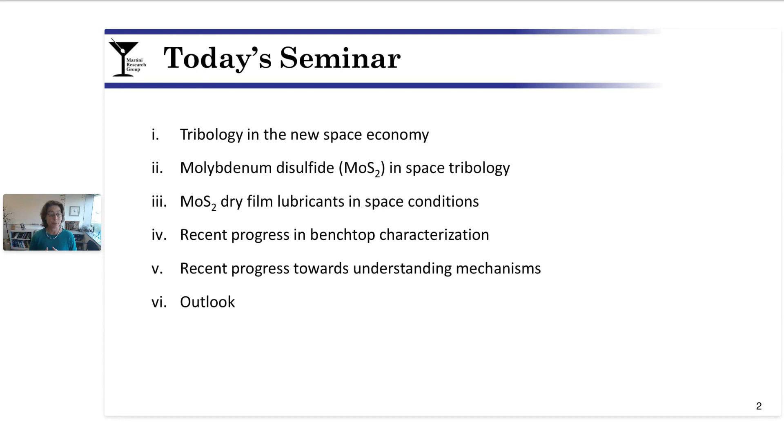So today's seminar is going to be organized as follows. We'll start at a real high level and talk about tribology in the new space economy. Then we'll dive in and focus on molybdenum disulphide, or MoS2, in space tribology and its properties in space conditions. Then I'll share some recent results from my group in terms of benchtop characterization and understanding fundamental mechanisms.

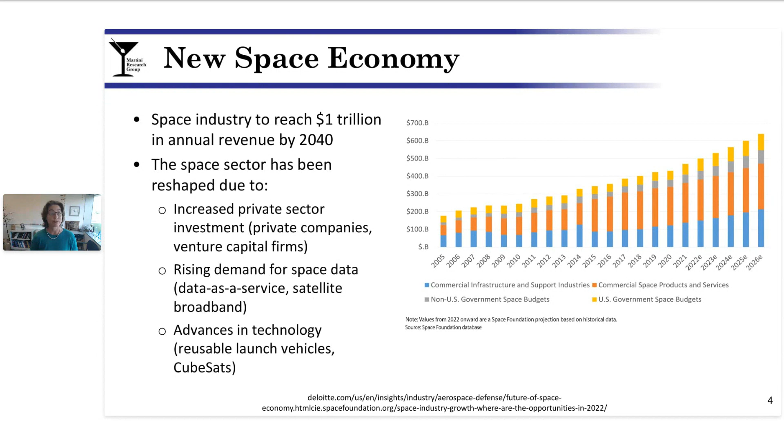Another way to look at the growth of the space industry is in terms of number of objects sent to space. So the plot that you can see here on the left is number of objects sent to space per year starting in 1990. And you can see that it's pretty constant, around maybe 100 or so objects sent to space until about 10 years ago. And then there's a rapid increase in number of objects sent to space, such that now we're talking about thousands of objects sent to space per year, or multiple objects sent to space per day. This has completely changed the way we think about the space industry, and in fact, probably the way we think about the Earth itself.

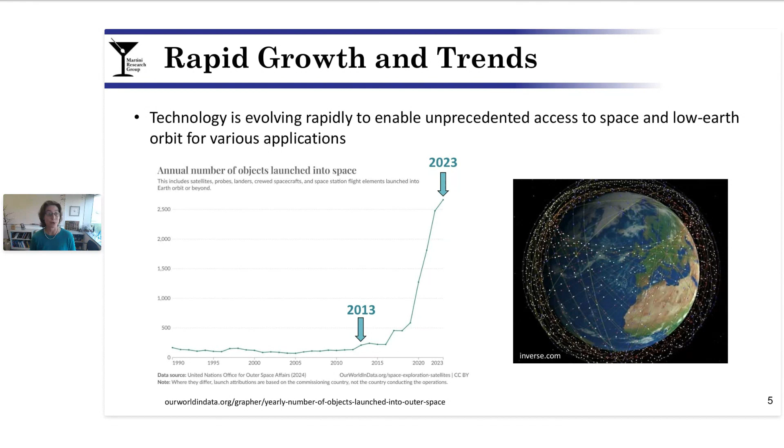So how does tribology fit into this big picture? Well, spacecraft, anything that goes to space that involves moving mechanical systems requires lubrication, and therefore involves tribology. There are a variety of prototypical mechanical components in space systems: solar array drives, reaction wheels, tracking antennas. All of these are mechanical systems that do have counterparts here on Earth, and we often think about space mechanisms in the context of, again, their terrestrial components.

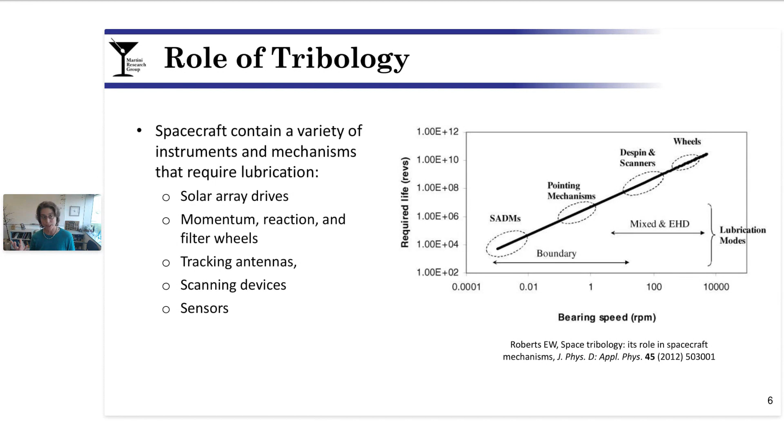Just as an example, the figure on the right shows required life versus bearing speed for a few prototypical space components where the lubrication regime is identified, sort of in the context of the traditional Stribeck curve. So there are many similarities between space tribological systems and terrestrial tribological systems. But there are also many key differences and, in fact, challenges associated with tribology in space. I would categorize these broadly into extreme conditions and, more recently, design for reusability.

So, as many of us know, the conditions in outer space are completely different from those that we have here on Earth, and therefore mechanical components must survive those types of conditions. Depending on the mission, this could include vacuum, could include radiation, very hot, very cold, or sometimes multiple different conditions in the same mission. This is an extreme challenge for tribological systems, but it's also an opportunity for us as tribologists because it gives us access to a wider range of conditions through which we can potentially better understand tribological mechanisms.

The other big factor is, again, more recent and associated with that more rapid or more frequent number of objects launched into space, and this is design for reusability. Today's launch vehicles are planned or intended to be used for multiple missions, where they go up to space, must experience space conditions, come back to Earth, experience some of our more challenging conditions like coast and marine environments, and then go back up. So these types of components have to survive many orders of magnitude longer than ever before. Again, a significant challenge, but also an opportunity for us as designers and engineers because it provides an opportunity for more frequent iteration and potentially more rapid design and development.

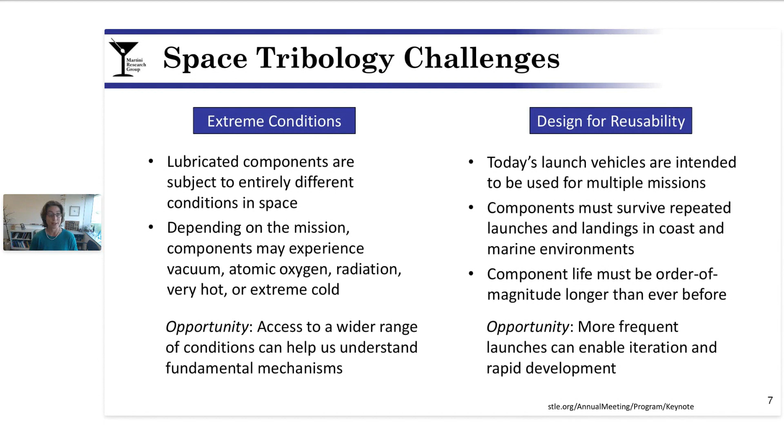All right, so I've talked a little bit at a very high level about tribology. Now let's focus in on today's topic, which is molybdenum disulfide. Molybdenum disulfide, or MoS2, is a naturally occurring mineral. It can be, again, found in nature or synthesized in the lab in a variety of different crystallographic phases. All of these phases comprise molybdenum and sulfur layers, and they can be found present in different crystallographic phases, having different thermal, mechanical, and even electrical properties.

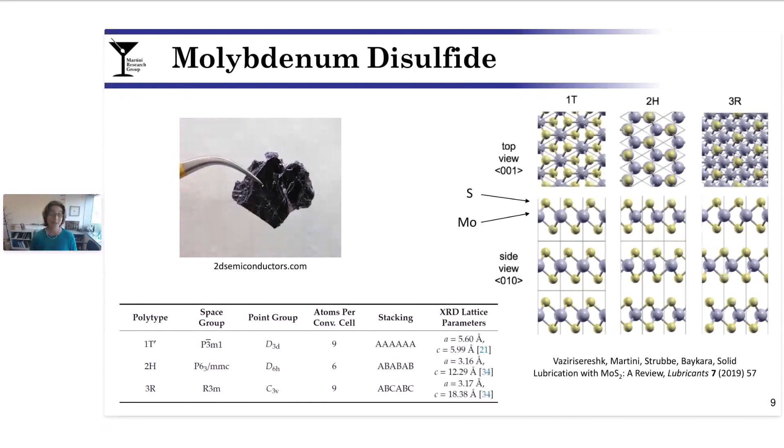However, from a tribological perspective, the most important aspect of molybdenum disulfide, or MoS2, is this layered structure, where we have very strong bonds within layers and very weak bonds between them. What this enables is the layers to slide very easily relative to one another, such that the material has low shear strength and imparts for us low friction and wear and good tribological properties.

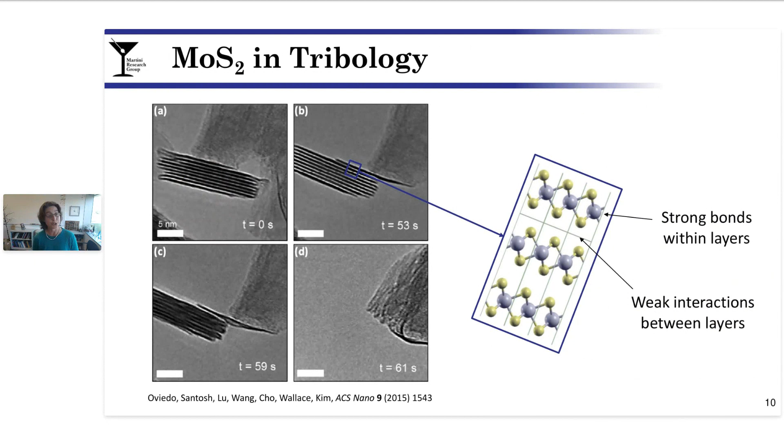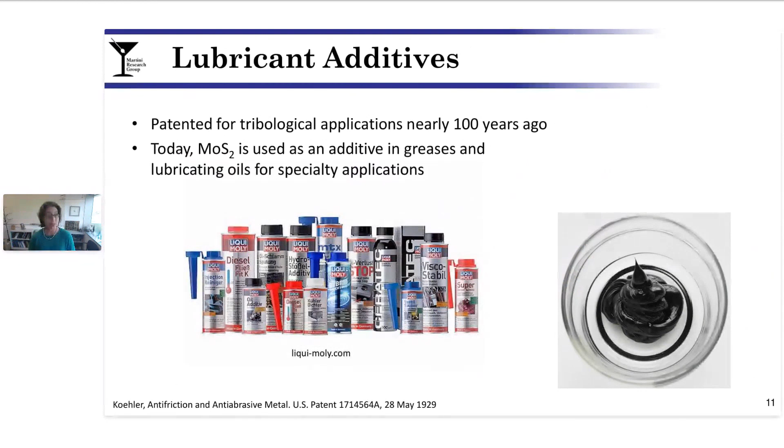MoS2 in lubrication is nothing new. In fact, the patent for MoS2 as a lubricant additive is almost 100 years old now. So it's been around for a while. And in fact, one can purchase MoS2 additized lubricating oils and greases for specialty products online even today. However, there are significant challenges with wet lubrication for space applications. The biggest one is associated with missions that have to experience extreme cold.

Just as an example, our Earth's moon at night or in permanently shadowed regions can reach minus 200 degrees Celsius. There's also great interest in exploring faraway lands like Jupiter's moon Europa, which has an icy crust and the potential for water and life underneath. But again, this requires actuation in extreme cold. To use a wet lubricant in this scenario, you basically have to heat it. This requires significant weight, significant cost, and most importantly, takes a significant amount of the total energy available for the mission.

Another challenge with wet lubrication is the finite vapor pressure of liquids. This could lead to outgassing or oil loss and contamination of very sensitive instruments. Therefore, for many missions, wet lubrication strategies are just not an option. The alternative, and what we're going to be talking about the rest of today, is dry film lubricants. These are slippery solids or solid lubricants and widely referred to in the industry as DFLs.

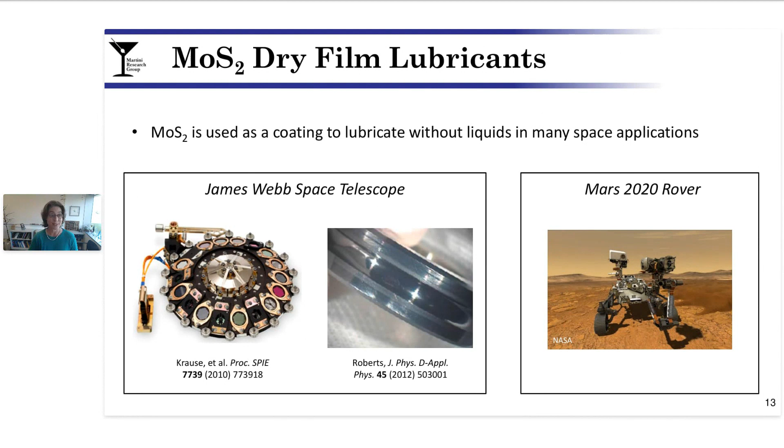MoS2 dry film lubricants are already used. Again, these are coatings or solid lubricants that are used without liquids. A couple examples are shown here. On the left, you see photos from the James Webb Space Telescope and an MoS2 coated bearing. On the right, you see the more recent Mars 2020 rover, where the actuating components in the sample caching system relied upon MoS2-based dry film lubricants. However, there are significant challenges.

So for the mechanical engineers out there, this may bring you back a little bit, but mechanical systems and components have been designed for decades, for a long time, to operate and are optimized for liquid lubrication. Just as a couple examples, I've shown you here some images from the ubiquitous Shigley's Machine Component Design. On the left side, you see a worm gear where the efficiency of the component is related to the friction coefficient. And on the right side, you see a rolling element bearing where we see the load-life relationship.

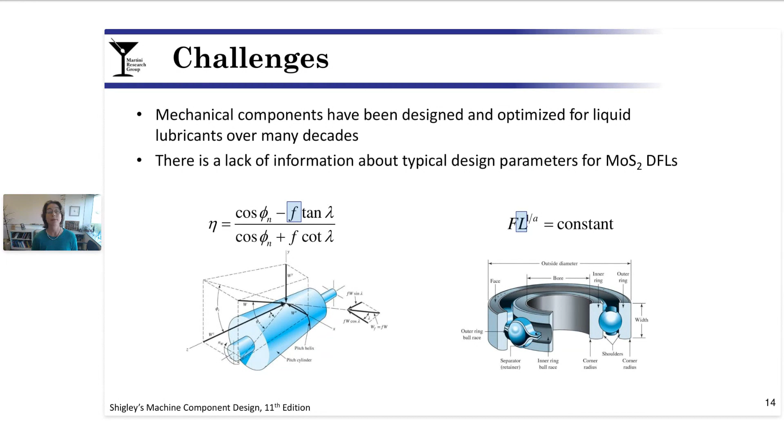These tribological metrics, friction coefficient and life, are pretty well characterized for liquid lubricants, and mechanical systems are designed to operate with these parameters. However, there's really a lack of information about what these parameters are for MoS2 DFLs, and even if the fundamental design equations may or may not be applicable. So how does MoS2 operate as a dry film lubricant in space conditions, and what are these design metrics?

First, how do we measure that? So ideally, one might wish to measure performance metrics in the application, for example, in the International Space Station. This may not be accessible to any of us, so often testing is performed here on Earth. This can be done at the component or subsystem level, or most commonly using benchtop tribo tests, where simple geometries like a ball and a flat are used to provide a comprehensive set of characterization data. Again, I'm referring to things like friction coefficient and life for MoS2.

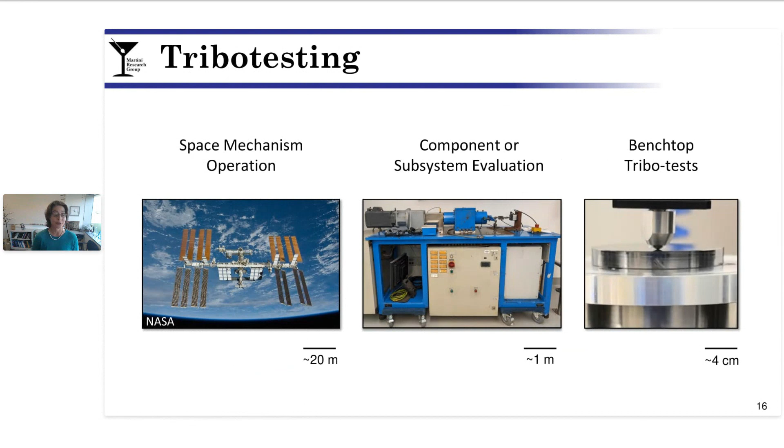But I think I mentioned this before, that conditions are extreme in space. So when we perform testing here on Earth, we do want to try to mimic space conditions. And this can mean a lot of different things. First of all, it's important to test in ambient conditions. It's important to test in air. And this is because every space component before it's sent to space has to be stored and tested here on Earth. And it's expected there was unplanned relative motion in components during transport to launch sites.

We'd like to perform testing here on Earth in a vacuum-controlled environment to mimic the low oxygen and low humidity conditions of space, as well as the low pressure directly. Or an alternative, easier approach is to test in dry nitrogen, where test chambers are flooded with nitrogen. Again, the goal is to remove the oxygen and humidity to mimic the space condition in a little bit easier to access type approach. We've already talked about temperature. It can be very hot, it can be very cold, and these types of conditions can be mimicked in specialized chambers here in a terrestrial environment.

So what do you get out of this? Shown on the right here is an artist's rendition of a friction coefficient versus sliding cycles plot. You measure lateral force, you calculate friction coefficient, and it looks something like this. You see a rapid decrease right at the beginning of the test. This is associated with run-in. Then you see a long, steady state, low friction period. This is the majority of the operation of the mechanical system.

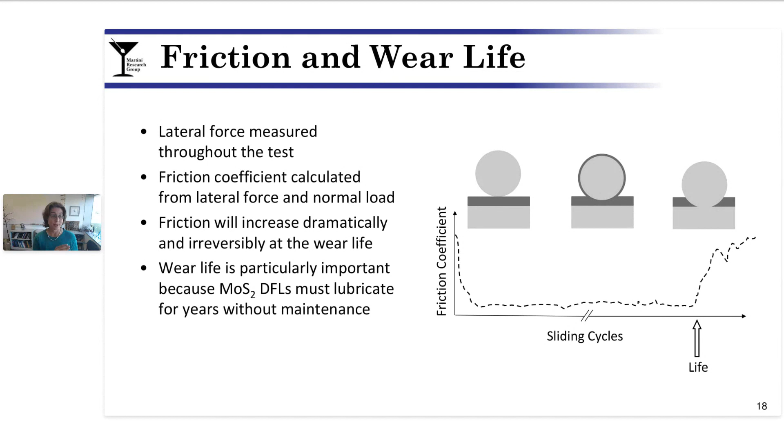So let's look at some representative results. What I'm showing you here are two plots of the friction coefficient as a function of either cycles or time from the literature. On the left, I'll bring your attention to comparing the green line and the purple line. The green line was tested at room temperature in humid air, and the purple line at room temperature in dry nitrogen. And what you can see right away is that the performance is far better with the purple data set, where we have no oxygen and humidity. And when I say better, I mean lower friction coefficient and longer wear life.

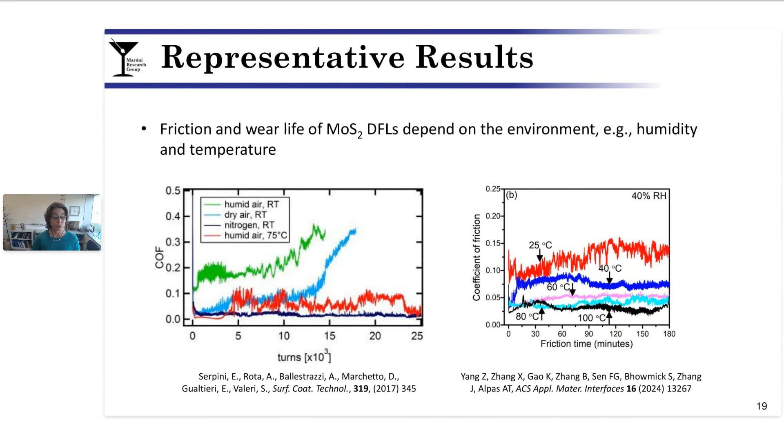In the figure on the right, the tests were performed all at 40% humidity, but at different temperatures above room temperature. And this result shows you that friction decreases with increasing temperature, again, above room temperature. So there's clearly a sensitivity to the environment of the MoS2 dry film lubricants. This can be largely attributed to the interactions between the MoS2 and oxygen and/or water, both of which can disrupt the easy shearability in different ways. Oxygen can chemically bond with the molybdenum disulfide to ultimately form MoO3, a less lubricious counterpart.

Water physically adsorbs to the MoS2, particularly at defects and edge sites. Both of these are disruptive and therefore can explain the observed poorer performance in humid conditions. However, oxygen and water interactions can also explain some temperature dependence.

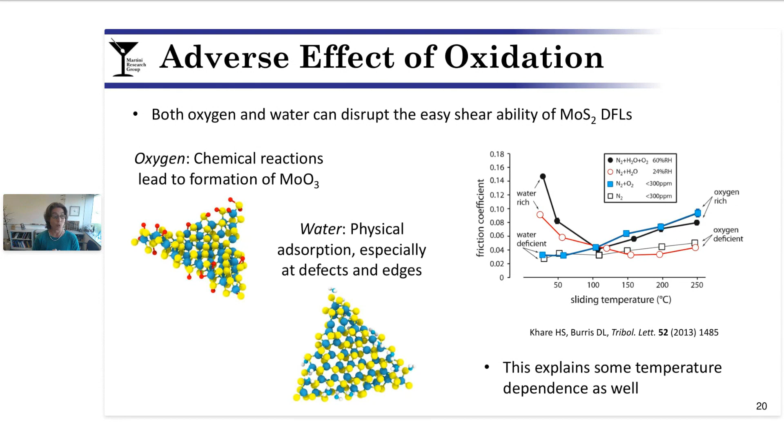The figure on the right is showing you friction coefficient versus temperature. The red data set was performed in water environment, and the light blue squares was performed in oxygen. And you can see that the red data set decreases with increasing temperature, and this is because increasing temperature desorbs water, whereas the blue data set increases with temperature, and this is because increasing temperature accelerates the chemical reactions associated with oxygen and MoS2. So the key to understanding some of these trends is understanding the role of water and oxygen in interacting with the MoS2.

So how do we mitigate this? One approach to mitigating the adverse effects of the environment and more generally improving the performance of MoS2 dry film lubricants is through the use of what are called dopants. These are elements or other compounds that are introduced into the MoS2 during deposition or synthesis. There have been a variety of different elements explored for space DFLs, including titanium, nickel, gold, and antimony oxide.

These elements or compounds can either substitute for the Mo or S in the lattice, they can intercalate between the layers, or they can potentially form separate phases. And which one of these happens depends on what is the element, what is its concentration, and the conditions during synthesis or deposition.

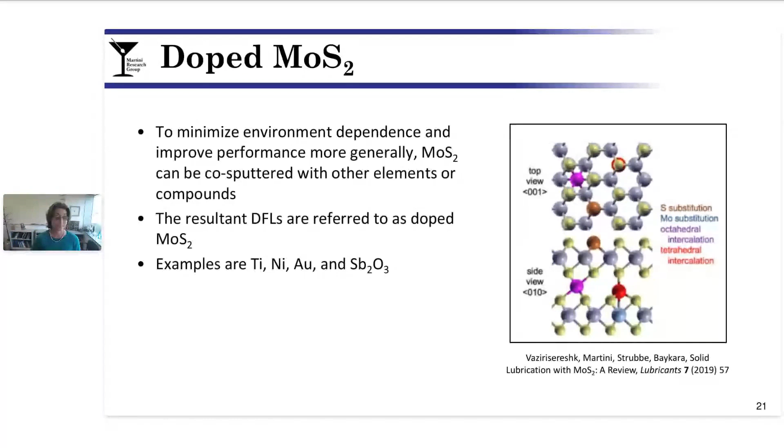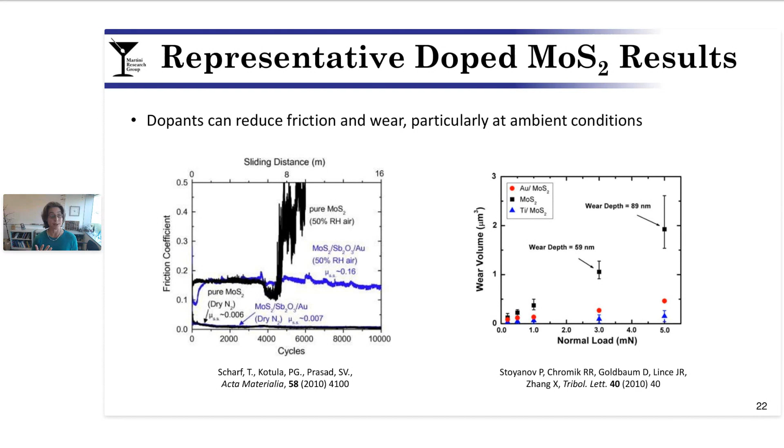So this type of data is incredibly valuable because, going back to our goal, we want to know these performance metrics, things like friction coefficient and wear life. We need this information to utilize MoS2 in design of mechanical systems. However, there's quite a bit more to be done. And in the next section, I'm going to share some recent results from our lab.

So let me start with the study that we performed to compare nickel-doped and undoped MoS2. Nickel has been a dopant for a while and is maybe a little bit more of a historical perspective, but has been considered as a space dopant for a bit. We performed these tests in ambient conditions, again, trying to mimic the testing that occurs before launch. And what I'm showing you here are SEM images of the surfaces prior to testing, where you can see in a scratch on the surface the lamellar or layered structure of the MoS2.

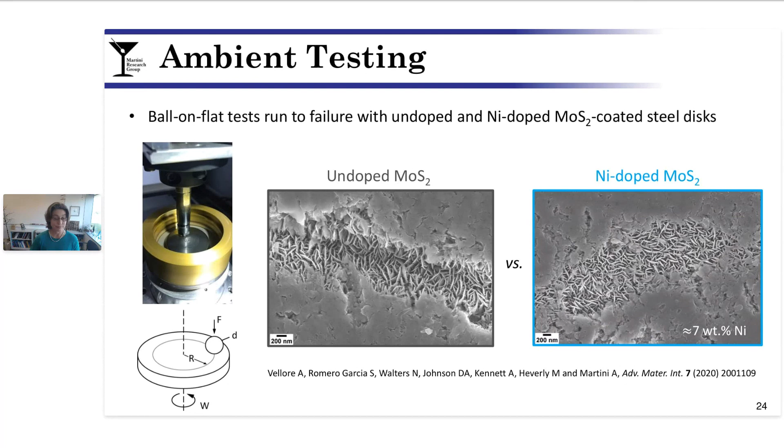Here we see a representative result. Again, this is friction coefficient versus sliding cycles. We see that prototypical or expected decrease at the beginning of the test, long, steady state constant friction coefficient followed by a spike that corresponds to wear life. We performed an elemental analysis such that we confirmed that indeed that high friction spike at the end corresponds to removal of the MoS2 from the wear track and therefore the life of the coating. But the key observation from this figure on the top of the slide is that the wear life of the nickel doped coating in the light blue is much longer in this condition than that of the pure MoS2.

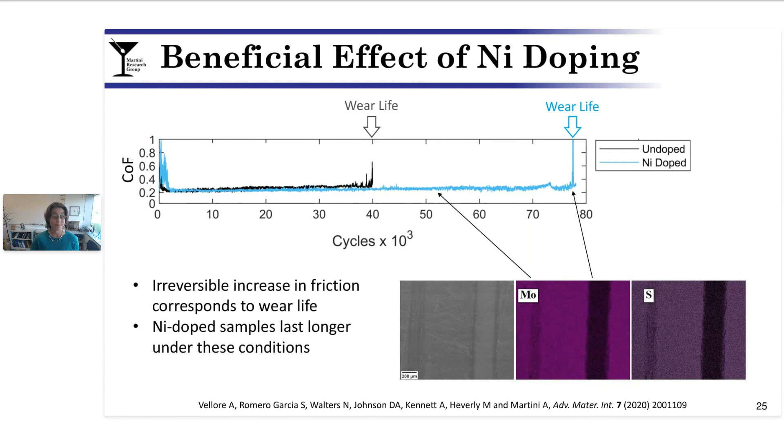However, we repeated this same test at different operating conditions. Specifically, we performed the test at different pressure and speed conditions designed to mimic those that would be expected in a corresponding gearbox for a space application. The results are shown here on the right, where you're looking at wear life as a function of pressure, where again, the speed is also varying. And the main take home here is that at low pressures and high speeds, indeed the nickel is beneficial and helps extend the wear life, whereas at high pressures and low speeds, we see really no benefit from using the dopant in these cases.

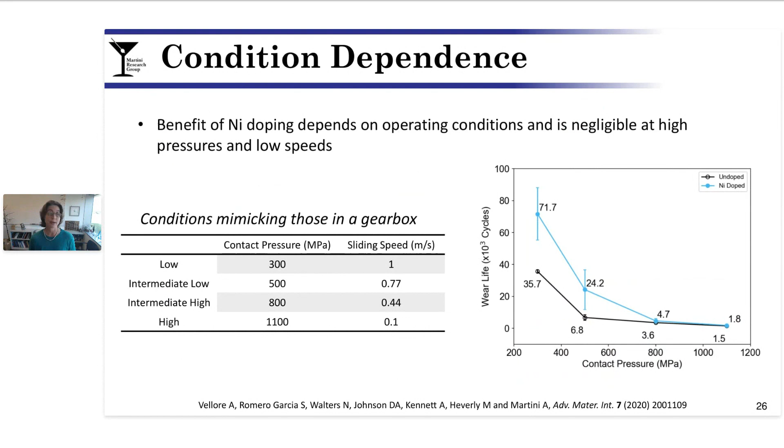Next, we extended this study to include another dopant, in this case, an antimony oxide gold, which is a little bit more of the state of the art these days for MoS2 dopants. And we also explored other conditions. So we moved on from air at room temperature to dry nitrogen at room temperature to dry nitrogen at 0 degrees Celsius.

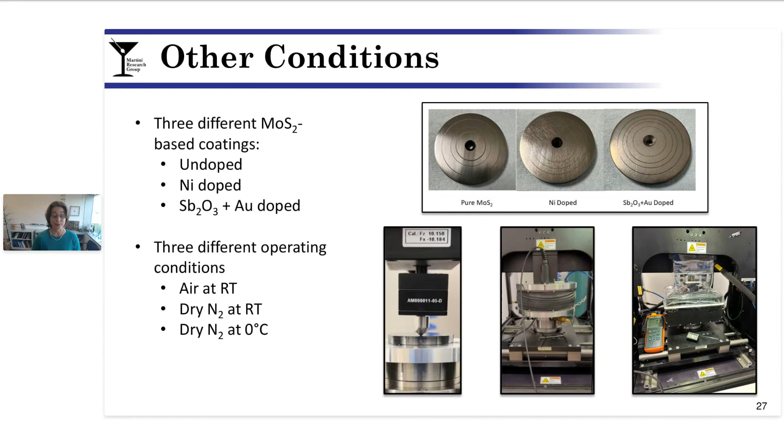Shown here are some representative results from these tests, and I'm not going to spend a lot of time on this slide because we'll go into it in a moment. But what you're looking at on the left is the pure MoS2, the middle is the nickel, and the right is the antimony oxide gold. The darkest colors, maybe not the brightest colors, represent the air, and you can see right away that those tests failed soonest, probably as expected.

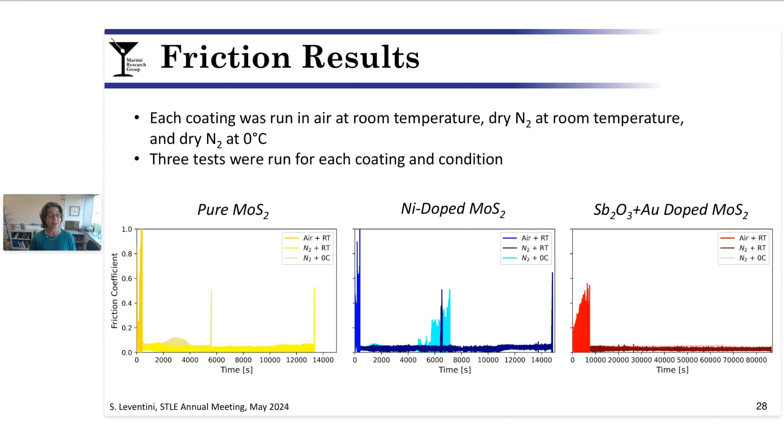And also, if you're perceptive and you're looking at the x-axis, you can see that the rightmost plot, the x-axis is much, much longer, already giving us hints that the antimony oxide gold doped coating is lasting much, much longer than the other two. Shown here is the complete data set. This is the wear life of these coatings at the 3 different conditions and the 3 different coatings. A lot to unpack here, but we can draw your attention to just a few points.

First of all, the wear life, which are the solid bars, is shorter in air for any of the dopants. In addition, the antimony oxide gold wear life is much longer than that of the other 2 in any of the conditions. The 2 red arrows on the far right indicate that the test was stopped before the wear life was reached. And lastly, looking at the temperature results for the tests that did fail, these are the square hashed bars, we can see that for the pure MoS2 and the nickel-doped MoS2, the wear life is shorter in the colder condition.

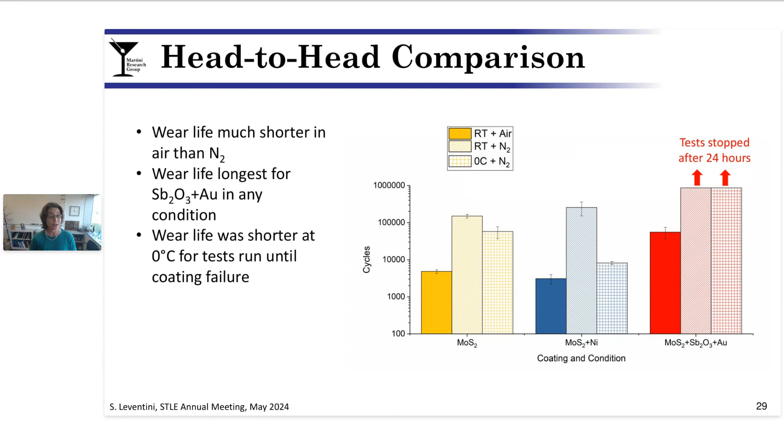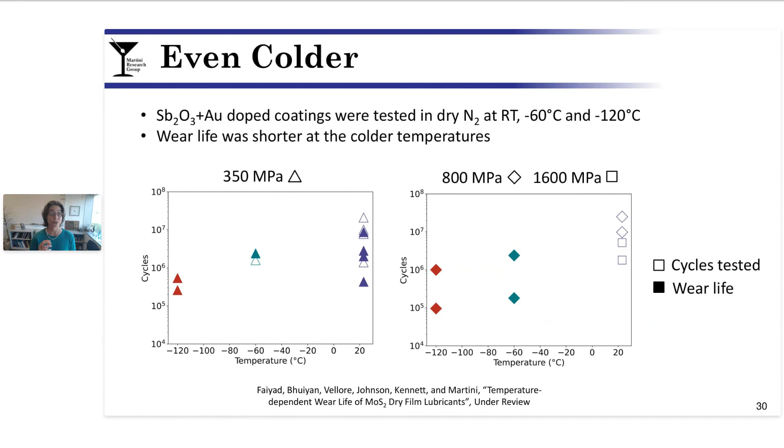But the main upshot of these plots is that as we go from room temperature to -60 to -120, the wear life of these coatings decreases. Again, this data is invaluable as we try to take MoS2 as a dry film lubricant to an enabling technology for space. However, what we really also want to do is understand the mechanisms. Why do we see these trends, and can we develop ultimately predictive tools? That's what I'll be discussing in the last section of this presentation.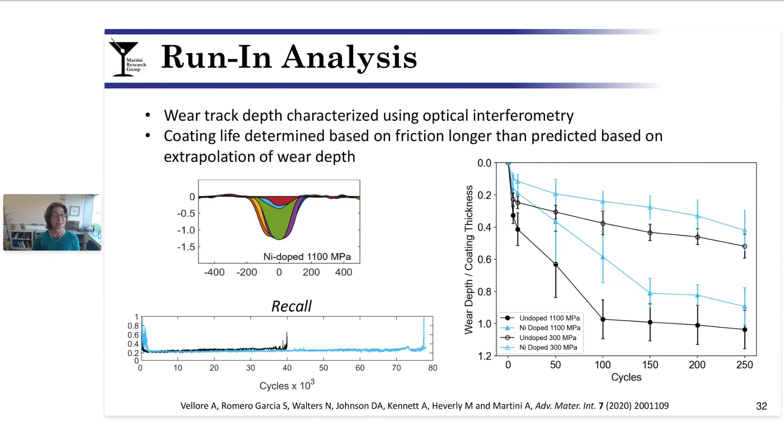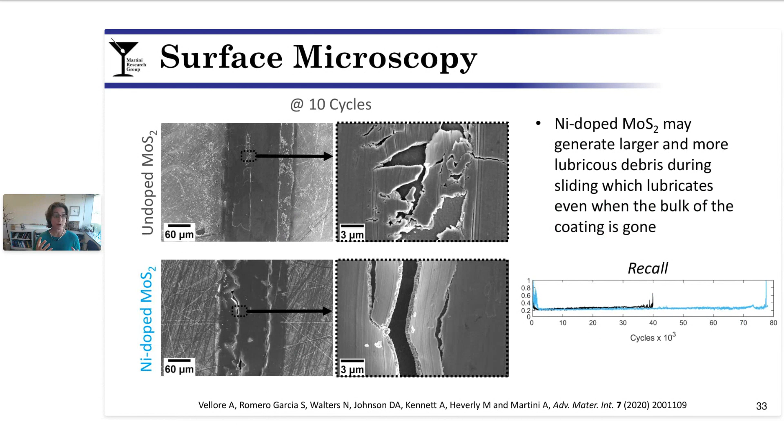And what you can see on this plot, which only goes to the first 250 cycles, is that even within those first couple hundred cycles, we've already reached, in some cases, the very bottom of the coating. This appears to be contradictory with the many thousands of cycles that we found for wear life based on friction. We also performed some microscopy of the early cycle results and found some differences in morphology between the nickel-doped and the undoped coating. So this suggests that this material or debris generated in the first few sliding cycles may be incredibly important as we think about why the wear life might be longer for the nickel.

So taken together, this kind of disrupts the simple mechanism that I started presenting you with, right? We talked about a long wear life followed by failure when the coating was gone. The results I've shown you here, along with multiple others in the literature, support a slightly more complex mechanism, where during these initial stages of sliding, and perhaps throughout sliding, debris or flakes are generated. And these are helpful.

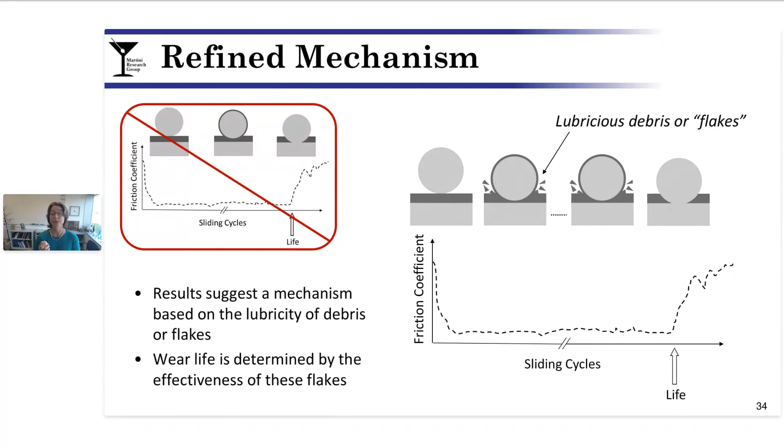They're lubricious debris or flakes that are available in the contact and ultimately are responsible for enabling the long wear life and determine the length of the wear life of each coating. So this is a pretty interesting idea, and it also enables us to try to move in a little bit closer to understand some mechanisms. In fact, it could point us to a way to understand the cold temperature results. Recall that we saw that wear life was shorter in cold temperatures.

What I'm showing you here on the right is a plot from the literature that shows the distribution of MoS2 debris size as a function of temperature. The white distribution is the coldest temperature at minus 100 degrees Celsius, and these are the smallest particles. So these results together suggest that possibly this useful lubricious debris is smaller when it's cold, which could possibly contribute to the shorter wear life.

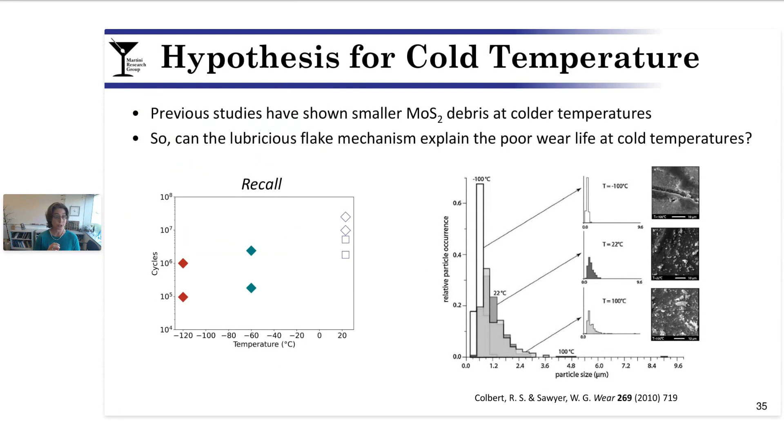The other advantage of this idea of the flakes or the debris is that we can zoom in a little bit closer and focus on nanoscale mechanisms. So we take our tribosystem and we zoom in just to the debris, just to the contact. MoS2 has been shown to be a triangular shape, shown to be prototypical or expected in equilibrium conditions, as shown in the microscope image here. And this idea has been leveraged in previous simulation studies to model the MoS2 at the atomistic scale. We followed a similar approach in our work, and for those who care, we developed atomistic models using the ReaxFF potential as implemented in LAMMPS.

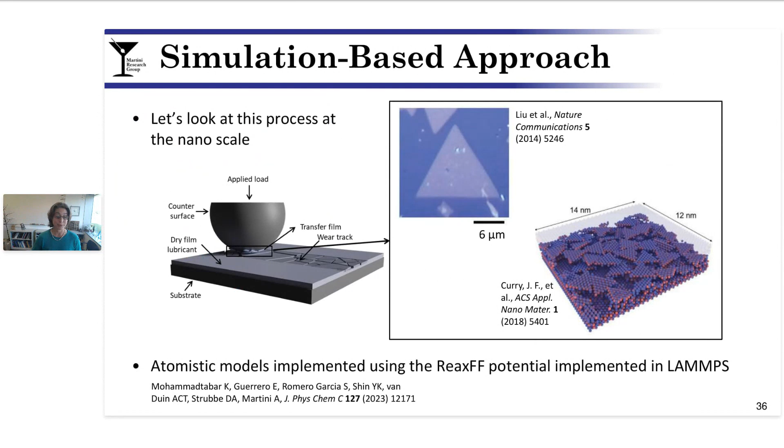The first thing we did was try to understand why the debris might be smaller when it's cold. To do this, we performed simulations of simple tension on MoS2 sheets, as shown in the lower left. And just a quick note that looking at the stress distribution in the sheet, we already do see these triangular patterns. But perhaps more importantly, in the stress-strain plot on the right, you can see that as we go from room temperature to colder, the fracture stress increases. Higher fracture stress is associated with more elastic energy stored in the material, and therefore more energy dissipated upon fracture, and theoretically smaller flakes or debris.

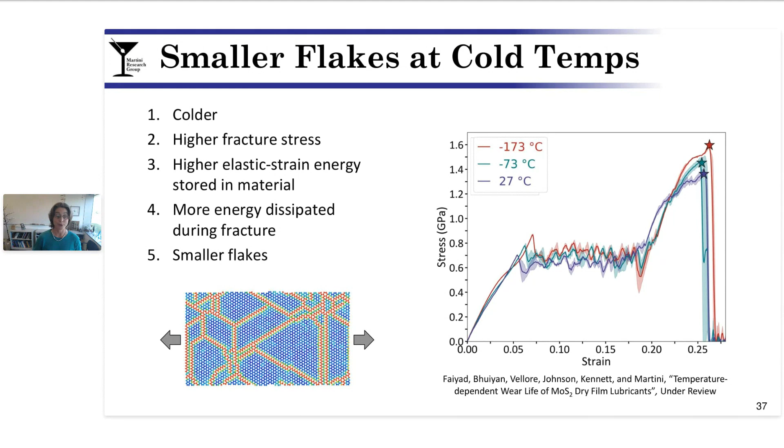We then evaluated the potential effect of this flake size on water adsorption. So we're talking about cold and we're focusing on water as opposed to oxygen. We performed simulations of water interacting with these triangular MoS2 flakes of different sizes. The figure on the right shows you adsorbed water density as a function of flake size for two different flake stoichiometries. And the key point here is that as we go from larger flakes to smaller flakes, the adsorbed water density goes up, meaning the impact of the water is more significant or perhaps more severe for smaller flakes, and therefore could more adversely affect the performance of the DFL.

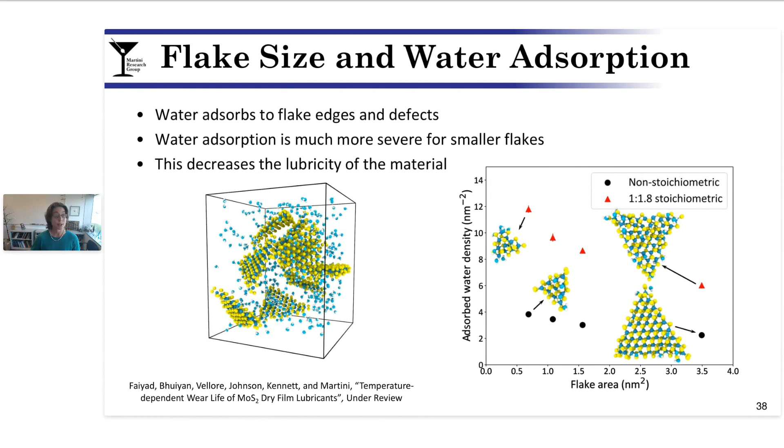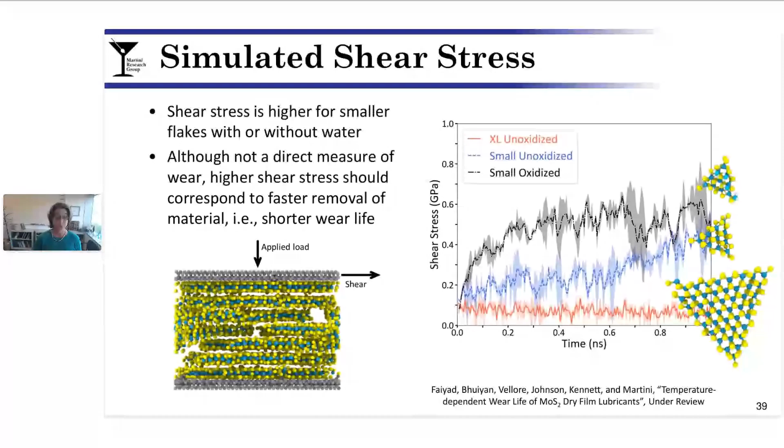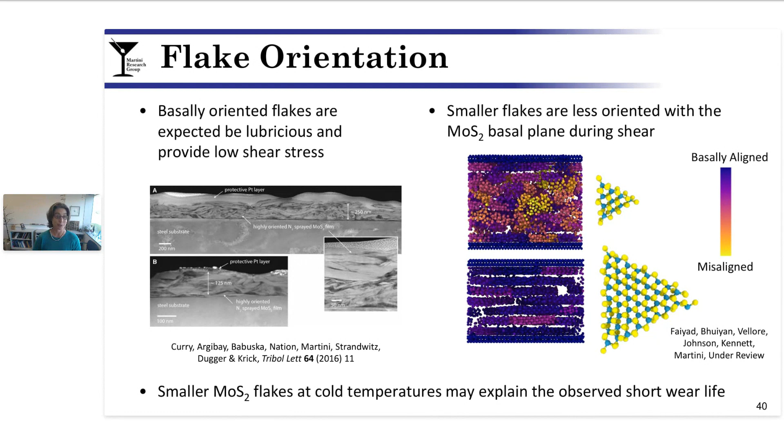All right, so we've gone pretty deep. Let's come back up for air to conclude the presentation. I'll summarize by saying I hope I have convinced you that MoS2 is a key enabling technology for this rapidly growing space industry and economy. There's already space components with MoS2 lubricants, but design challenges remain associated with the fact that there's just not enough data for these tribological performance metrics, and we really don't quite have enough understanding. This can be achieved, again, through benchtop test characterization and also surface microscopy and simulation-based approaches.

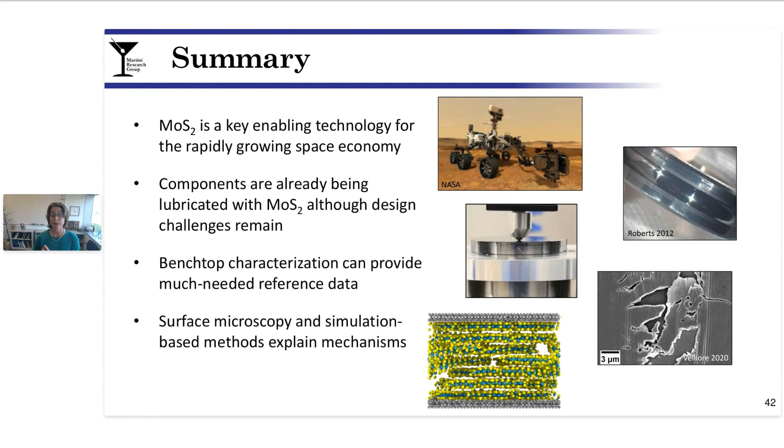So the challenge, coming back to the beginning, is that there's just not enough information about these typical tribological design parameters for MoS2 dry film lubricants. I suggest that we need a combination of characterization and understanding to meet this challenge. Characterization, I believe, should focus on commercially available DFLs because, again, things are being sent to space right now as I'm speaking, but also DFLs for which we know the composition so that we can interpret results.

We want to try to mimic space conditions as closely as possible here in our terrestrial environment and try to make apples to apples comparisons between DFLs, between conditions, and so on. This should be coupled by efforts to understand mechanisms. We should design simulations to complement experiments. And even when a head-to-head direct comparison is not possible, we should corroborate trends so that we can give some confidence to the simulation results, and also make comparisons between micro and nanoscale features that we can observe in microscopy.

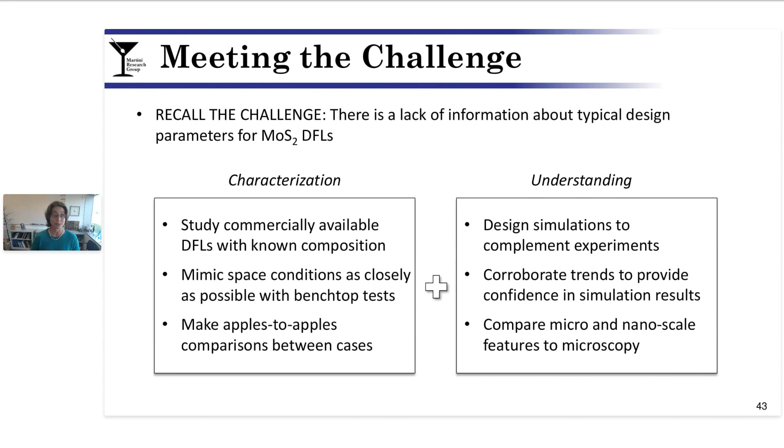So finally, what are the Martini keys to success? I believe that we really need close collaboration between applications engineers who are, again, sending things to space right now, and research scientists who have the laboratory tools and the expertise to understand mechanisms. Together, they can have impact. We also need to bring both experimental and computational tools across length and timescales to the fore. Together, these are what we will need to gain on the understanding towards predictive tools.

I would also suggest that we should focus on open access publications so that we can share information broadly and potentially even data sharing. For example, some journals have article types like data notes. But maybe most broadly, we as an engineering and scientific community can make an effort to get the word out, to make sure there's widespread understanding of the critical role of tribology and MoS2 in space technology. Together, we as a scientific community can have a huge impact on technology that's going to determine or maybe even enable the future of space exploration.

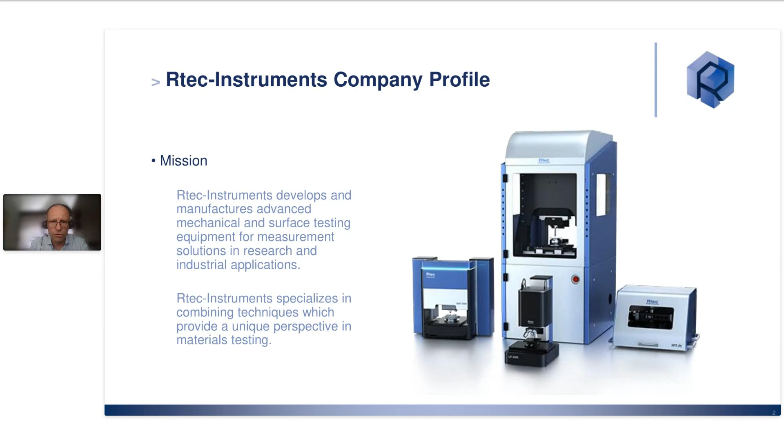So I will introduce shortly Rtec Instruments if you are not familiar, and I will give you some application of the tribometer that could be related to the space application as well. So Rtec Instruments is a scientific instrument manufacturer for surface characterization, and there are in fact different applications related to this technology. So we are developing and manufacturing advanced mechanical and surface testing equipment that implies tribometer, but not only tribometer. There are in fact other instruments and techniques like 3D profilometer that make it an ideal instrument for surface characterization in different methods of testing or different environments.

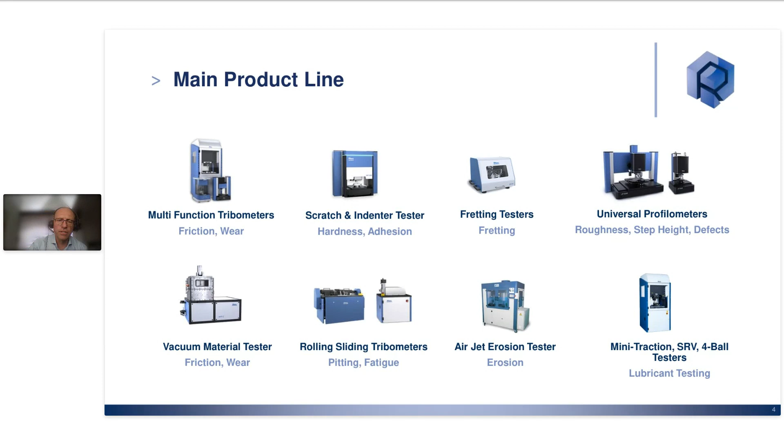There have been, in the recent development of Rtec Instruments, other instrumentation in tribology: rolling sliding, twin roller, three roller tester, air jet erosion tester, but also specific tribometers related to lubricant testing. The mini traction machine, SRV tester or four ball tester are testing techniques that are well known in the lubricant industry. In fact, one of the interests of the multifunction tribometer is the possibility on a modular platform to do different ranges of measurements.

So it's not necessarily an instrument that is able to do all kinds of testing in all conditions with one configuration, but the possibility to add different modules of measurement in order to go from very low force, in the millitribometer range, in the range of millinewtons, to very high load for specific applications, up to 10,000 Newtons. And as well from very low speed to high speed testing with different kinds of motors.

And the modularity is also brought by the different functional modules that we could install on the instrument. So we can do rotary motion, linear reciprocating, block on ring, disc on disc, and other different modes of testing that I'm not explaining today.

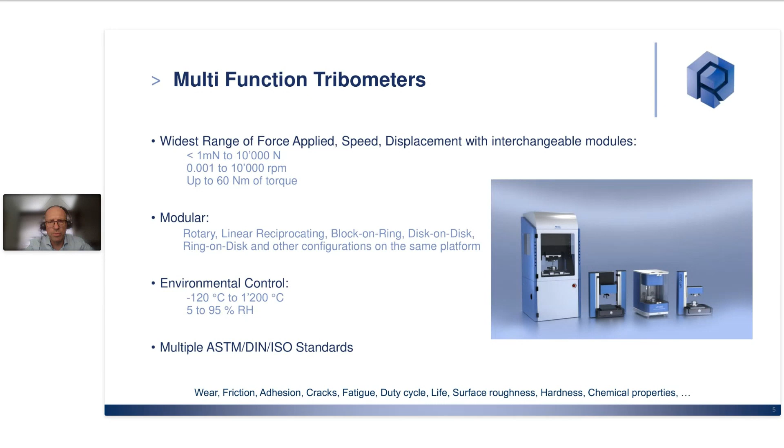But in fact, environmental control is a key factor for tribology testing. You have seen that results of coefficient of friction and wear could be highly dependent on the environmental condition, meaning that if you test a certain material in air or in vacuum or at different levels of humidity, you could have very different results, not only on the coefficient of friction, but also on the wear lifetime of this kind of material. And I will insist today a little bit on this range of application.

The interest of the multifunction tribometer and the specificity of Rtec Instruments is the possibility to have mechanical testing in front of the instrument, like on the MFT 5000 tribometer, where you have the tribometer setup in front of the machine, but with the X and Y motorized stage, you are able to install a 3D profilometer at the back of the instrument in order to automatically make measurements between tribology measurements and 3D profilometry in an integrated manner.

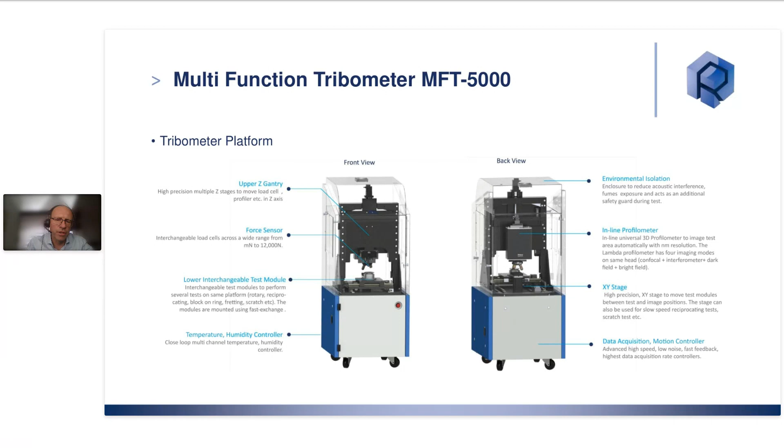So the big advantage of the modularity is that we could be closer to the real conditions of the tribological test. If you have a bearing, the testing condition is more in a rotation mode. But with other kinds of material, linear oscillation could be more appropriate to reproduce the condition. We are also testing lubricants; with the lubricant present, we could do testing in a liquid cell and simulate the condition in the presence of liquid lubricant. And for both of these conditions, dry or liquid, we are able to do testing in heating and cooling conditions.

And that's in fact one of the key factors for the space industry as well: the possibility to do testing in different environments. You could do testing in vacuum conditions with a vacuum tribometer, but on a multifunction tribometer, you could also do testing at different temperatures and different levels of humidity.

So one of the very popular setups with our kind of instrument is the possibility to do high temperature testing. Depending on the application and the level of budget, it's possible to propose a heating stage going from a low range of heating to the middle or high range in order to fit the different applications. But it's true that there are many requests nowadays for the possibility to do cooling as well.

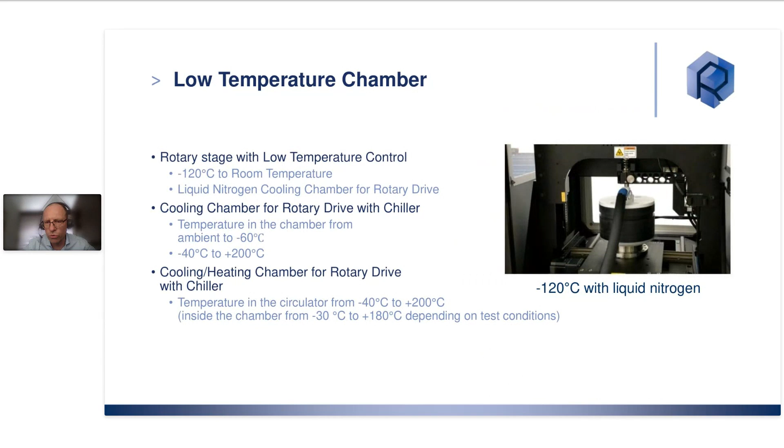the low temperature. It is true that depending on the liquid which is used, in the case of liquid nitrogen, you can go to very low temperature, minus 120 degrees Celsius, but it's also possible to use other kinds of liquid in order to go to minus 40 or minus 60 degrees Celsius.

The other evolution that we had was the possibility to offer a new humidifying system or humidifier in order to have in a closed chamber the possibility to control the level of humidity. And it's true that people may forget that in tribology, the coefficient of friction may vary very strongly with the level of humidity, meaning that if you test in a different country, you may have different results if you forget to record the level of humidity in the laboratory.

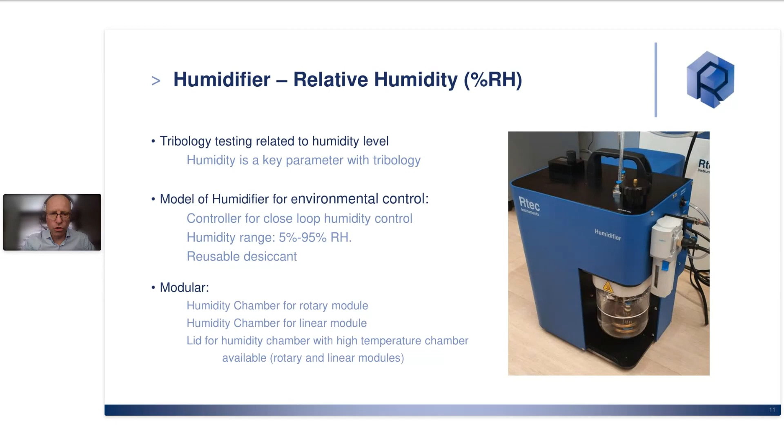But with this kind of option, we can control the level of humidity and in fact reproduce different levels of humidity in order to see the variation of the coefficient of friction as a function of humidity.

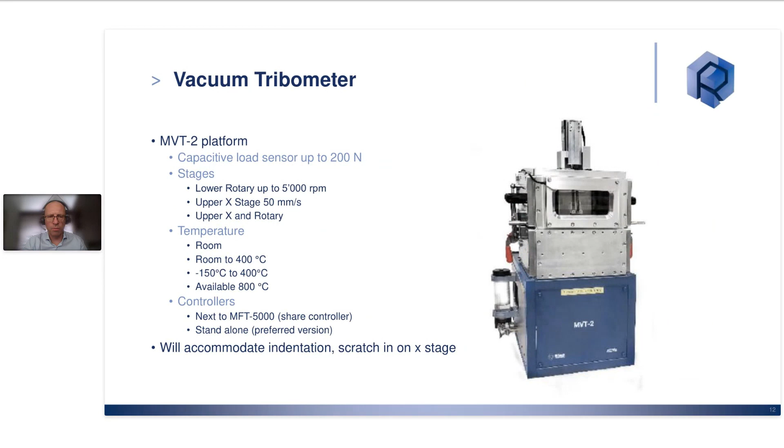And then, of course, for space application and other applications as well, the vacuum tribometer could be quite interesting. There are different coatings and lubricants that are very well known to have a very large difference of coefficient of friction depending on the level of vacuum. MoS2 was presented today, but there is also the DLC coating, which is very well known to have a tremendous variation of coefficient of friction if it's tested in air or in vacuum. And then it could be combined with different levels of temperature control in order to reproduce the real condition in

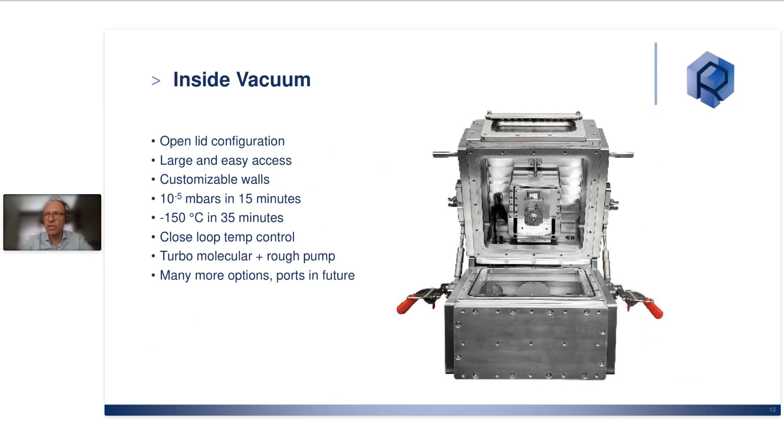the field. The interest of the vacuum system is the fact that we can have a force control where we could change the speed of rotation, we can change the load applied in order to be able to change the condition of testing without cutting the vacuum, meaning that you can change the condition of testing while doing the tribological test.

In fact, why are we able to do very stable and very precise measurements in vacuum? It has been relatively easy for Rtec Instruments by the fact that we have developed a patented system called argon sensor, which is based on a capacitive sensor. And capacitive sensors are in fact not sensitive to vacuum or humidity level. And then we could do testing with a very high stability and negligible drift over a long time.

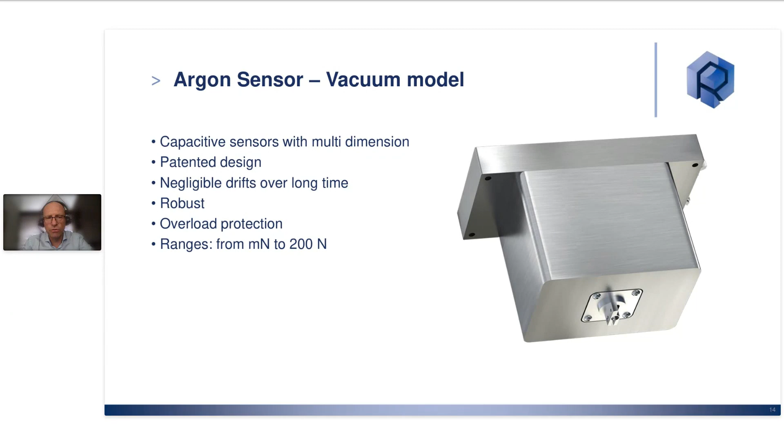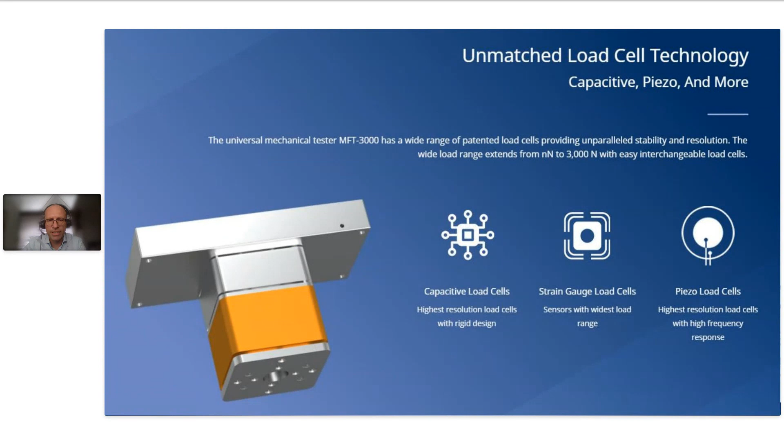So I would just like to introduce a little bit the different technology of Rtec Instruments. We have been using piezo sensors for high frequency tests like the fretting tester. But the advantage of the capacitive load cell patented by Rtec Instruments is bringing a very high level of stability. We have a very specific system with an elastic arm, which is based on two force sensors measuring the lateral force during the test. And the fact that you have two sensors is making high stability measurements and

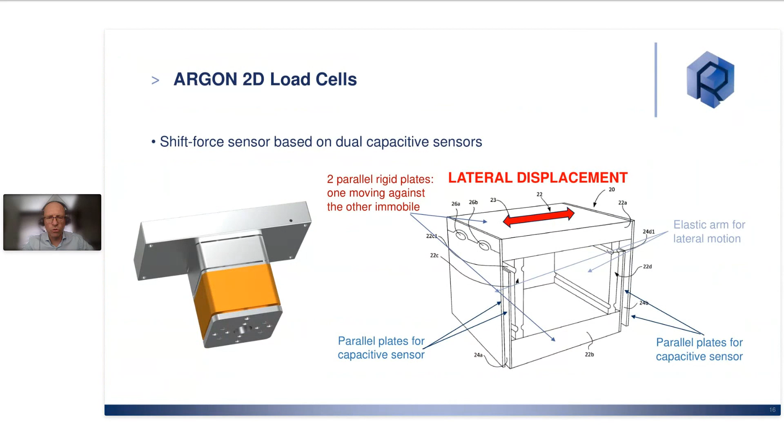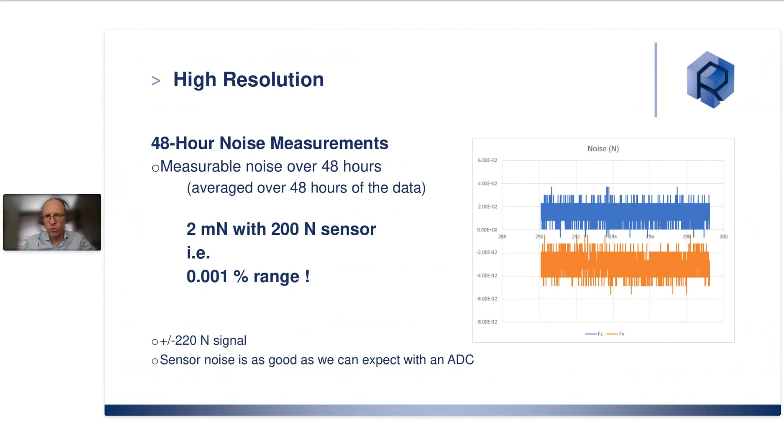high precision measurements. And this is really high technology and high precision measurements that we can explain to you in more detail if you are interested, but it's really bringing a lot of stability, meaning that we can do measurements with this capacitive sensor over 48 hours. And we are in fact showing very high stability and no thermal drift with this kind of instrumentation.

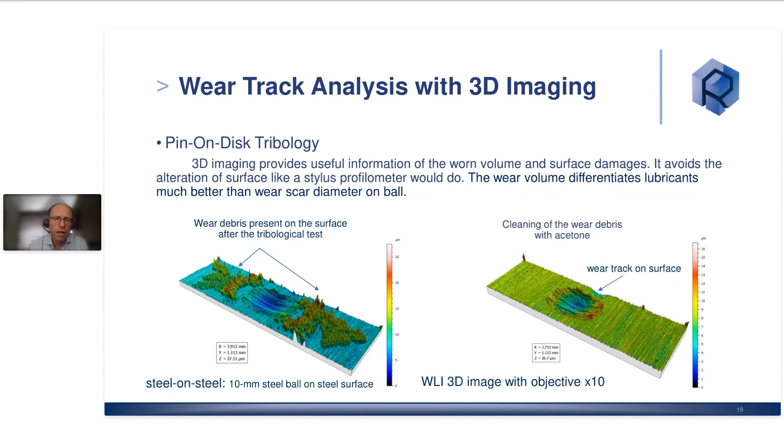So just to conclude on this kind of measurements, I explained to you shortly that we have a 3D profilometer combined with the tribology measurements, and that makes it very useful for characterization of wear on the material. You can imagine stopping the tribological test at different cycles or different levels in order to make a 3D image of the surface, and then bringing a little more insight or more advanced vision about how much plastic deformation and wear there is on the material while you are doing tribological testing.

In fact, the big interest of this combination and the typical friction analysis that we may do with our instrument is to record the coefficient of friction as a function of cycle or time, and see on a specific example on a coating where the coating might be breaking, what would be the wear time of this material, and then with the 3D profilometer be able to observe the 3D deformation on a very precise level at different locations on the sample.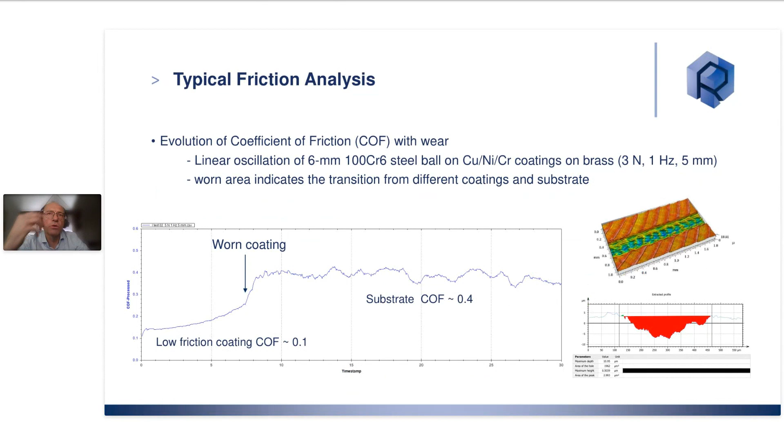So really this combination of 3D profilometry with tribology is bringing a lot of advantage for characterization in tribology. Just to conclude, I presented you shortly the multifunction tribometer MFT 5000. It brings a high level of modularity, a lot of functions. I only introduced a few of them today.

The focus was more on the environmental control, because that's a nice explanation about the interest of changing the environment with different materials, and the previous presentation was showing that by changing temperature, humidity, or vacuum level, you could really observe a very big difference in the coefficient of friction and wear of material. And this combination is in fact very important for tribology measurements.